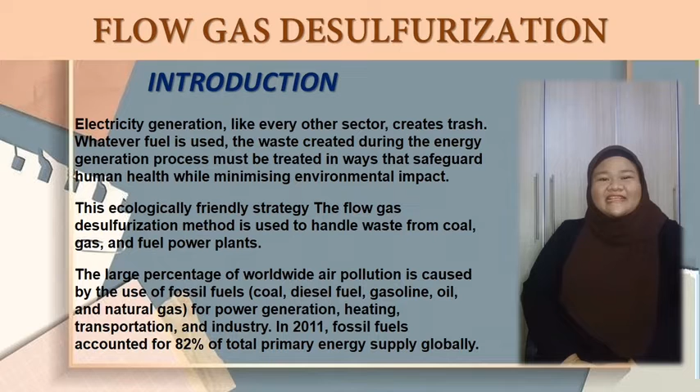The burning of fossil fuels, coal, diesel fuel, gasoline, oil, and natural gas for power production, heating, transportation, and industry produces the vast majority of global air pollution. In 2011, fossil fuels accounted for 82% of total primary energy supply worldwide. Oil, natural gas, and coal make up 81% of current fuel usage in the United States.

Energy-related fossil fuel conversion in high and middle income countries, as well as biomass burning in low-income countries, are responsible for the majority of global air pollution, accounting for 85% of airborne respirable particulate pollution and nearly all sulfur dioxide and nitrogen oxide emissions to the atmosphere. Black carbon, polycyclic aromatic hydrocarbons (PAH), nitrogen and sulfur dioxides, mercury and volatile chemicals that generate ground level ozone are also released. All are associated with multiple adverse health effects in humans.

Human health and environmental risks have been connected to sulfur dioxide. The greatest concentrations of this gas are often found around big industrial plants. When breathed, sulfur dioxide can cause a variety of health problems, particularly in the very young, the elderly, and people with respiratory disorders. Sulfur dioxide interacts with other airborne pollutants to produce sulfate, which causes extra respiratory harm, such as tearing lung tissue and damaging the cardiovascular system.

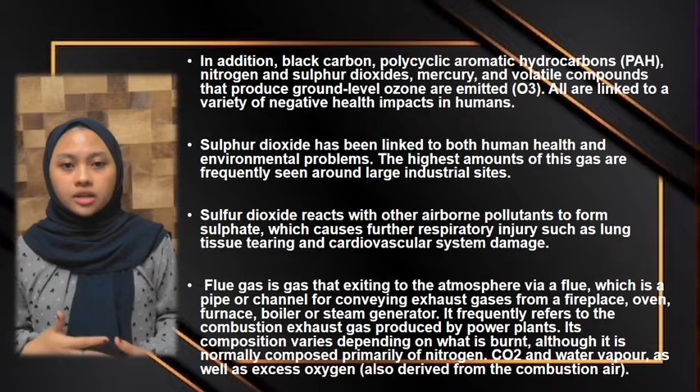Flue gas is gas exiting to the atmosphere via a flue, which is a pipe or channel for conveying exhaust gases from a fireplace, oven, furnace, boiler, or steam generator. It frequently refers to the combustion exhaust gas produced by power plants. Its composition varies depending on what is burned, although it is normally composed primarily of nitrogen, CO2 and water vapor, as well as excess oxygen, also derived from the combustion air. It also includes trace amounts of contaminants such as particulate matter, carbon monoxide, nitrogen oxide, and sulfur oxide.

Sulfur dioxide is responsible for acid rain formation. Stringent environmental protection regulations have been enacted in many countries to limit the amount of sulfur dioxide. Flue gas desulfurization was an important development to meet environmental challenges. Flue gas desulfurization, commonly FGD, is the technology used for removing sulfur dioxide, SO2, from the exhaust combustion gases of fossil fuel power plants and from the emissions of other sulfur oxide emitting processes. It is a control device that absorbs and reacts using an alkaline reagent to produce a solid compound.

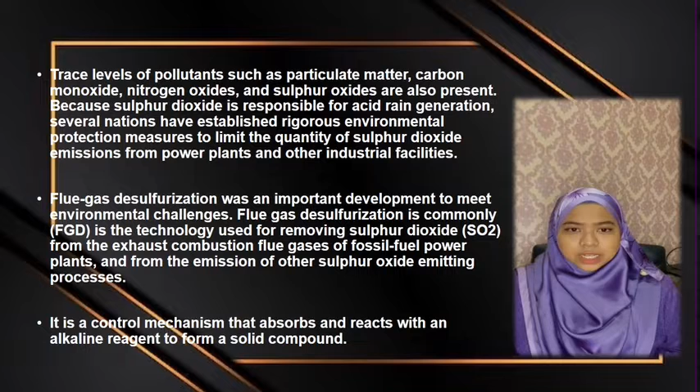The major types of large-scale power plant FGD systems include spray towers, spray dryers, and dry sorbent injection systems. There are various types of wet scrubbers, for example, spray towers, venturi scrubbers, packed towers, and tray towers. Slurries would cause serious erosion problems in a venturi scrubber because of the high speeds at the throat of the venturi section. Packed towers or tray towers would plug up if handling slurries. For handling slurries, the spray tower is a good choice and is in fact a commonly used choice in large-scale FGD systems.

Spray towers are used downstream of the particulate equipment, an electrostatic precipitator or baghouse, where the flue gas contains very little, if any, combustion fly ash. In a spray tower system, the sorbent slurry is simply injected via spray nozzles into a vertical tower where the slurry droplets are contacted with the upflowing flue gas.

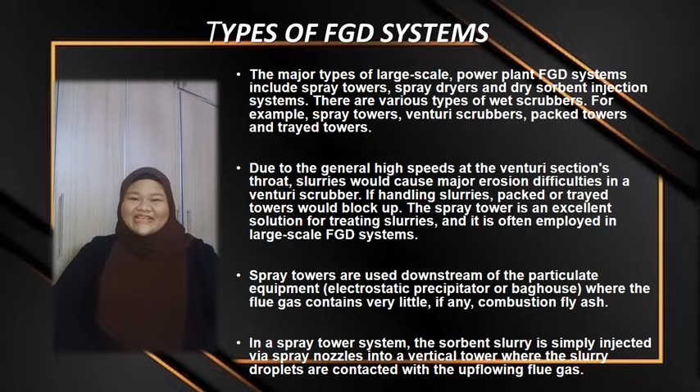Part of the water in the slurry is evaporated by the hot flue gas, and the flue gas becomes saturated with water vapor. The SO2 dissolves into the slurry droplets and reacts with the alkaline sorbent particles. The slurry falls to the bottom of the spray tower and is sent to a reaction tank where the reaction is complete and a neutral salt is formed.

Next, for spray dryers, it's used upstream of the particulate removal equipment, electrostatic precipitator or baghouse, where the flue gas contains the combustion fly ash. In a spray dryer system, the alkaline sorbent is usually lime slurry. The water is completely evaporated by the hot gas, and the residence time in the vessel is about 10 seconds, allowing the SO2 and any other acid gases such as SO3 and HCl to react.

The dry powder is removed from the flue gas along with the combustion fly ash in the particulate removal equipment. Some of the solids from the particulate removal equipment, fly ash, calcium sulfite, calcium sulfate, and unreacted lime, may be recycled and used as part of the sorbent slurry.

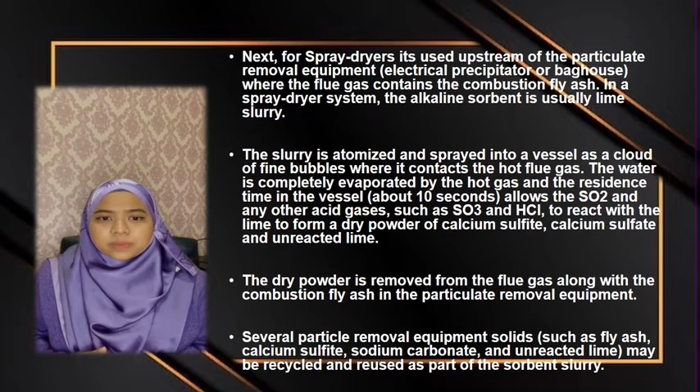Lastly, the dry FGD system simply injects powdered lime or limestone sorbent directly into the flue gas. As shown in the adjacent location diagram, the dry sorbent may be injected into any one of three locations: the upper section of the steam generator, the economizer section of the steam generator, or the ducting between the air preheater and the electrostatic precipitator. The powdered sorbent is pneumatically injected through lances designed to distribute the sorbent evenly across the flow paths in the flue gas.

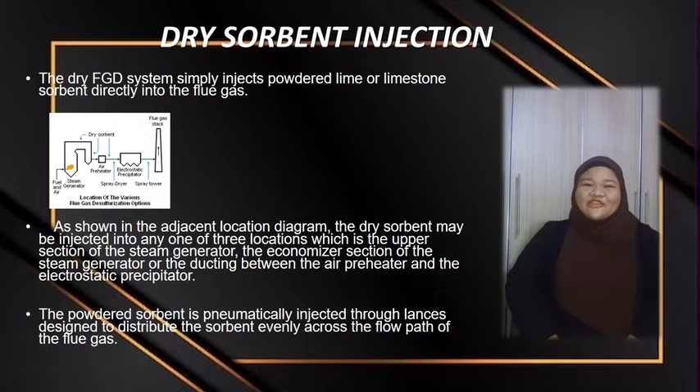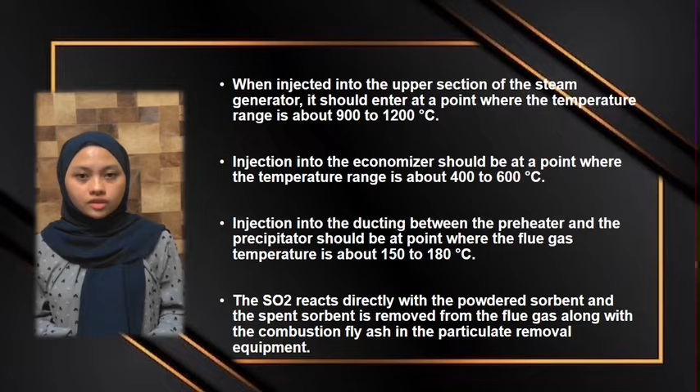When injected into the upper section of the steam generator, it should enter at a point where the temperature range is about 900 to 1200 degrees. Injection into the ducting between the preheater and the precipitator should be at a point where the flue gas temperature is about 150 to 180 degrees.

When injected into the upper section of the steam generator, it should enter at a point where the temperature range is about 900 to 1200 Celsius. Injection into the economizer should be at a point where the temperature range is about 400 to 600 Celsius. Injection into the ducting between the preheater and the precipitator should be at a point where the flue gas temperature is about 150 to 180 Celsius.

Despite the fact that the use of scrubbers reduces air pollution, concerns have been expressed about their possible influence on the marine environment. The use of scrubbers shifts the environmental effect of sulfur from emission to the atmosphere to direct discharge into aquatic systems. The discharged SOx is neutralized by the seawater alkalinity when the wash water from open-loop scrubbers is released back into the sea.

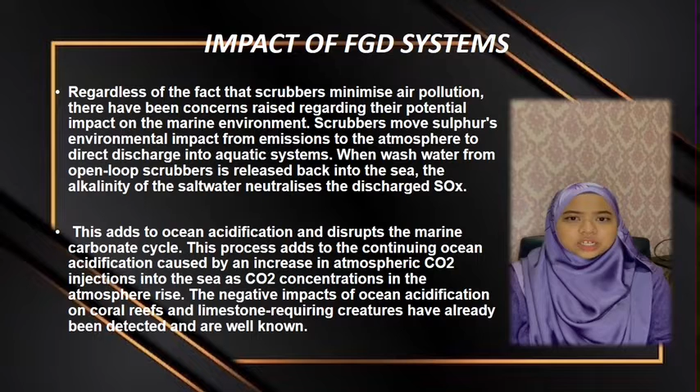The process adds to the continuous ocean acidification caused by increased atmospheric CO2 uptake into the sea as CO2 concentrations in the atmosphere rise. The negative impacts of ocean acidification on coral reefs and limestone-requiring creatures have already been detected and are well documented.

Furthermore, lowering the pH from roughly 8 to 6.5 causes large volumes of carbon dioxide to be released from the saltwater, contributing to the carbon dioxide emission from the engine exhaust. This partly encouraged the IMO to start the approval procedure for ship-based CO2 collection.

Furthermore, in addition to excessive sulfur emission, the scrubbers are known to result in higher emission of other harmful species such as metals and PAHs. Furthermore, the discharge water has a biochemical oxygen demand, resulting in a decrease in oxygen in the immediate environment and a negative impact on the local marine ecology.

In conclusion, there are technologies other than FGD under development that may offer options for emission control, but they are unlikely to be deployed rapidly enough to obviate the need for FGD in the foreseeable future. The dominant commercial FGD process is non-regenerable lime or limestone slurry scrubbing.